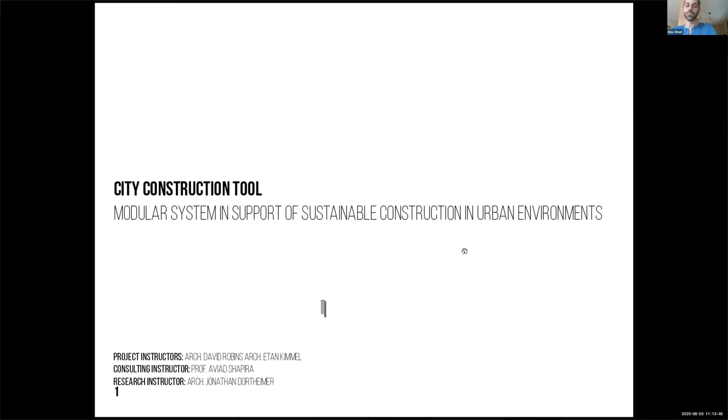So my presentation is about construction sites within the urban environment. These sites have a significant ongoing impact on our life. So the first question of this research is basically how come there are so many sites in urban areas nowadays?

Cities are constantly growing, as we all know, due to immigration and urbanization. These processes raise the land values, and hence buildings are constantly demolished and replaced with new ones which are more suitable for their changing environment. These trends raise the amount of construction sites.

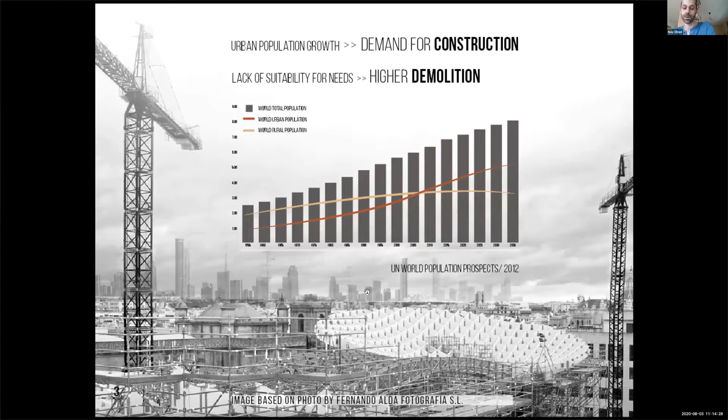Now, the potential effects of these sites include traffic congestion, delays, disruption of economic activities, large amounts of construction waste, noise pollution, as well as compromised walkability, as we can see here in this picture. Out of these, the most severe impact is considered to be the damage to the urban traffic infrastructure, including cars, bikes, and most importantly, pedestrians.

Next, I will examine the city of Tel Aviv to learn more about the scale of this issue. As of January 2019, out of 47,000 existing buildings, there were about 9,000 requests for construction permits. I would like to repeat that number, 9,000 requests for construction permits, which are in various statuses.

About 2,000 of them are currently being processed. About 1,000 were already approved. About 3,500 buildings are currently in construction. About 800 final certificates have been obtained. And finally, about 1,000 have been populated over the last 10 years.

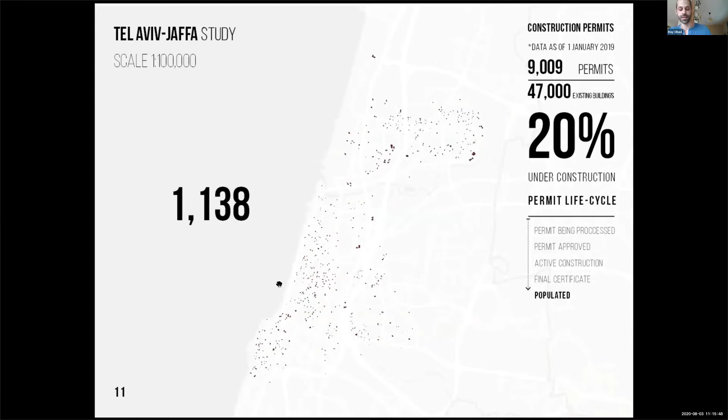So this data suggests that overall, approximately 20% of the city is constantly undergoing the construction process. Hence, I aim to study how to improve the urban construction process so that it could actually benefit the city and reduce the negative impact on its surroundings.

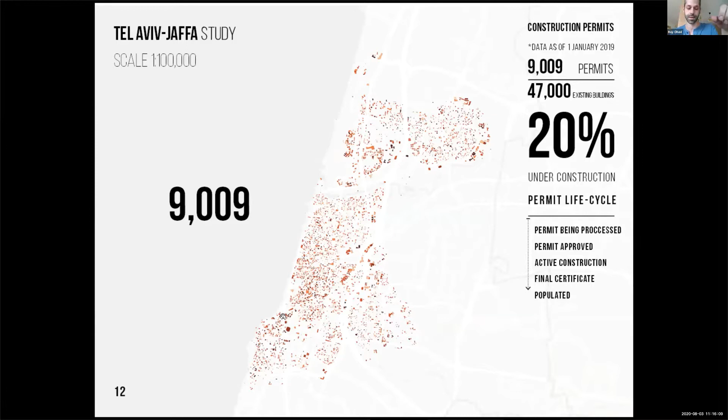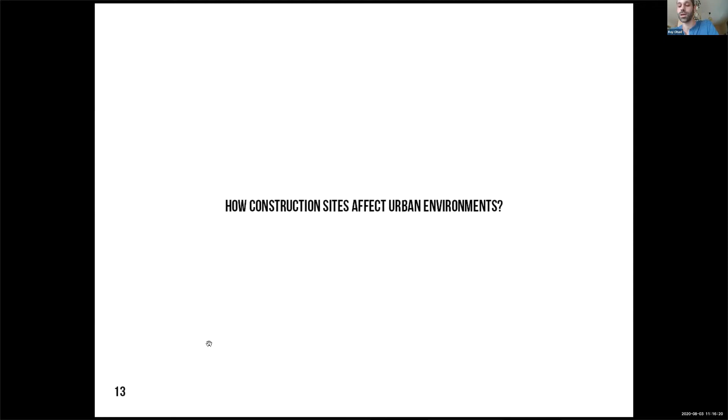So we are all familiar with the nuisance caused by these sites, but how do they actually affect their immediate surroundings, and how do the authorities react to this nuisance?

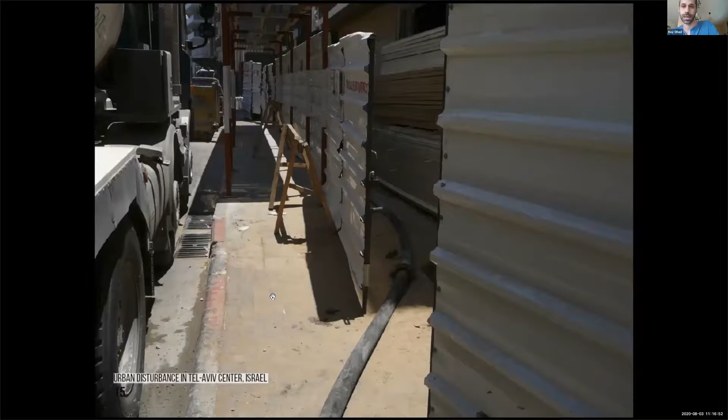Moreover, the contractors must compensate at their own expense for any damage caused by the violation of those regulations. As we can see in the pictures, those regulations are not always followed.

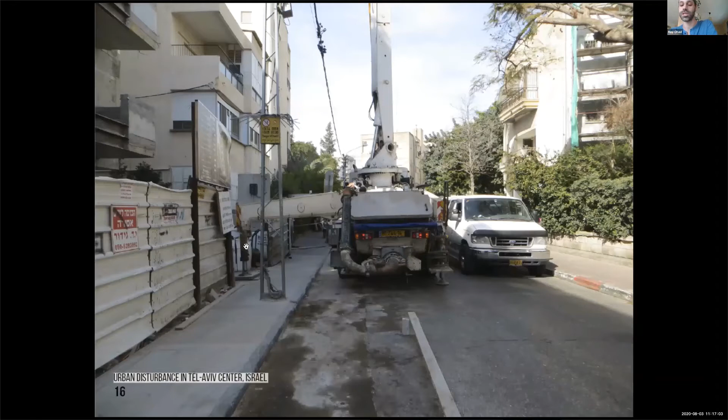So actually the construction method and the type of machinery chosen by the contractor greatly affect the severity of the disturbance. Nevertheless, in the current state of affairs in Israel, the contractor and the owner will usually choose the most cost-effective method without having to justify their choice to parties that are not involved in the contractual agreement.

So the community or the city dwellers, us, we are never a part of this decision, although we are affected by it so much, as this decision is based mostly on minimizing costs and duration of the construction process.

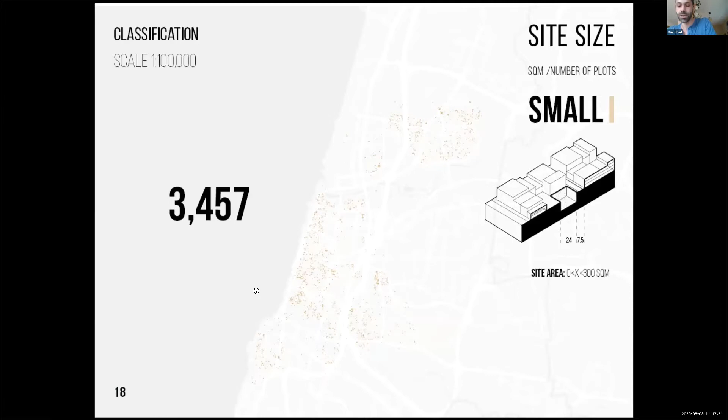So how may we classify the construction site? Is it possible to distinguish between their impacts? The most intuitive classification of the site is by its size. According to this, there are approximately 3,500 small sites, about 3,000 medium ones, and 2,300 large sites.

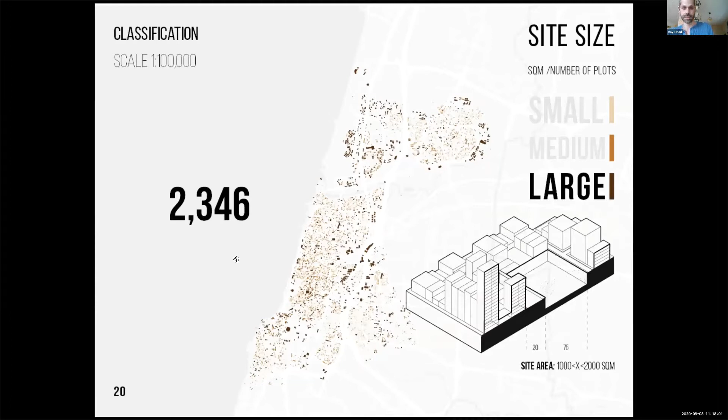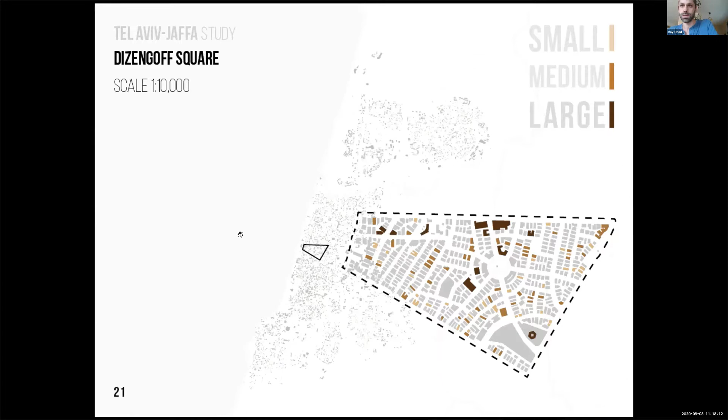We can zoom in here to the surroundings of Dizengoff Square. We can see the different sizes, as well as the permit life cycle, as I mentioned before. And most importantly, we can see here in this diagram the impact of the construction sites on the urban traffic infrastructure. Each red dot that you see represents one such disturbance to the city.

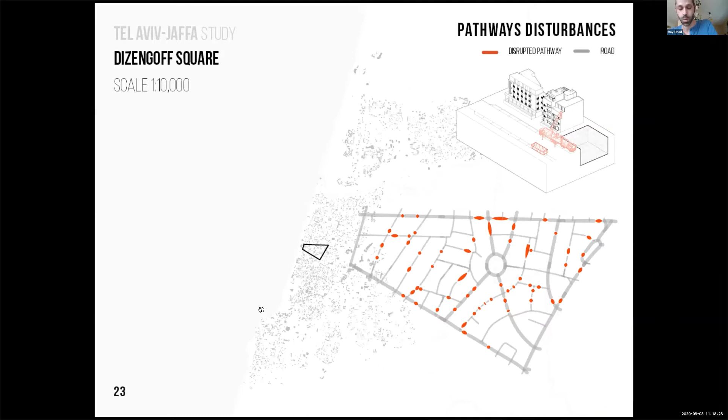So why is the impact on the traffic infrastructure considered to be the most severe? Each site requires a proper workspace. When there isn't enough space within the site boundaries, naturally public space is expropriated. There is a major burden on these sites due to the need to transport materials throughout the construction period, and this is a thing that may take even years. Moreover, aside from the material transported to the site, waste is accumulated that needs to be removed.

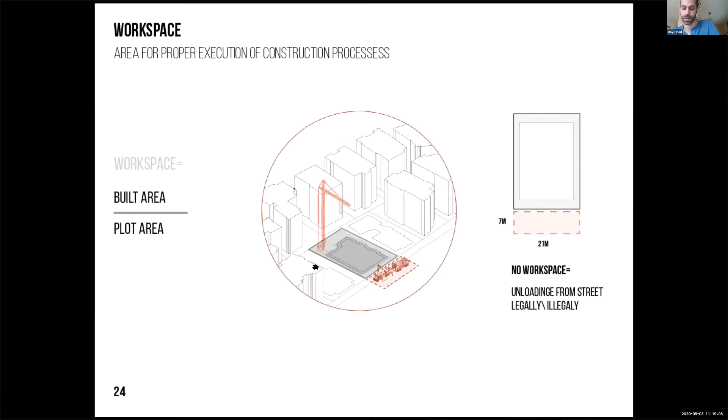So there are two main scales from which we may examine this issue. First, the urban scale, which entails travel delays, road traffic, and even accidents. Second is the site scale, which shows the prolonged closure of roadways and sidewalks, as well as the loss of parking space. My presentation focuses on the second of these scales, the site scale.

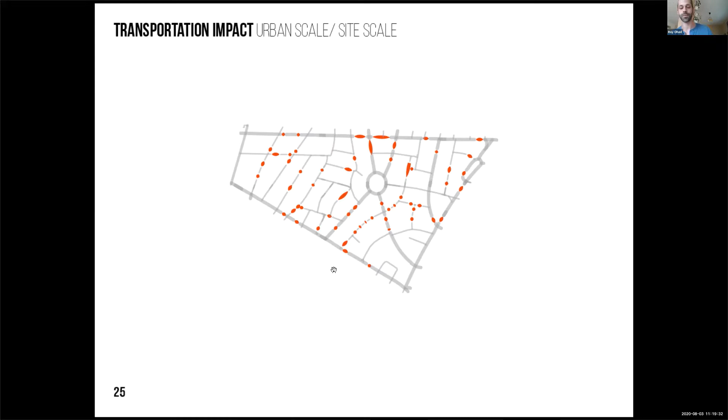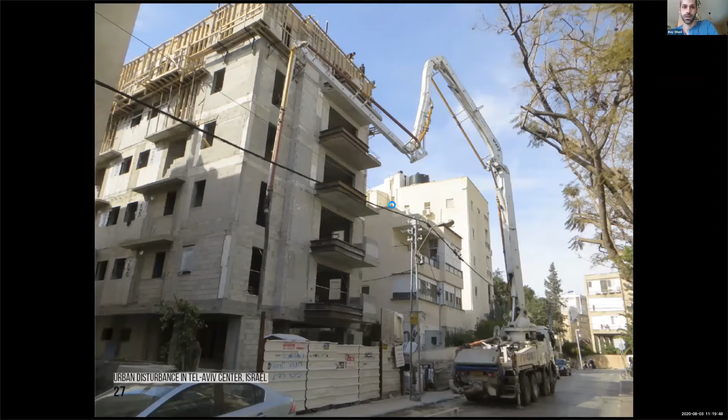So here we can see how these construction sites and the choice of machinery impacts the streetscape. These pictures are taken from Tel Aviv center.

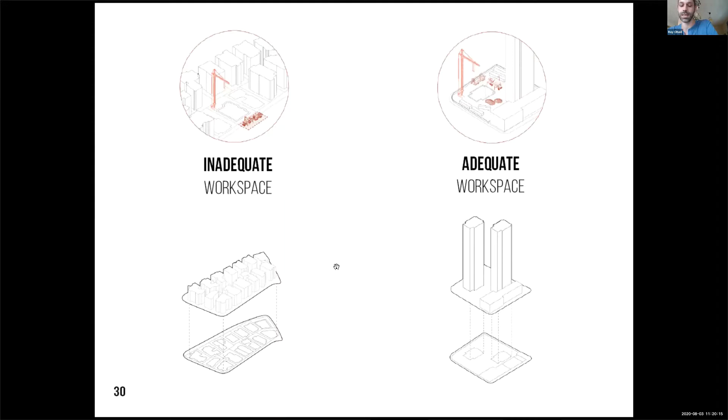It is very important, in my opinion, to note that high-rise buildings sometimes tend to have a small urban footprint. So in those cases, they may cause a prolonged and severe disturbance. Therefore, the size of the site may not be the best way to examine this issue. Instead, I suggest assessing how adequate the available workspace for construction is.

A typical construction process for concrete buildings consists of several main stages, starting from the groundwork, continuing with the foundation work, to the structural frame, and concluding with the finishing work. Nevertheless, some stages take place simultaneously to allow for a more efficient work schedule.

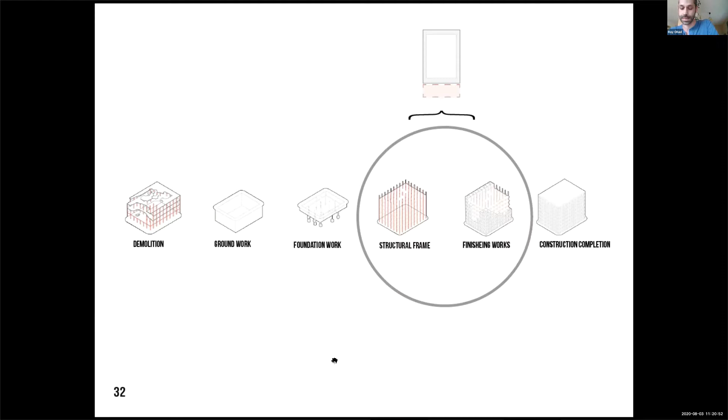Once the construction of the structural frame begins, the lack of space in the site becomes an even greater problem. So therefore, my work focuses on the construction of the structural frame and the finishing work. The processes derived from these are establishing the frame, transporting the materials for the finishing works, and of course, removing waste from the site.

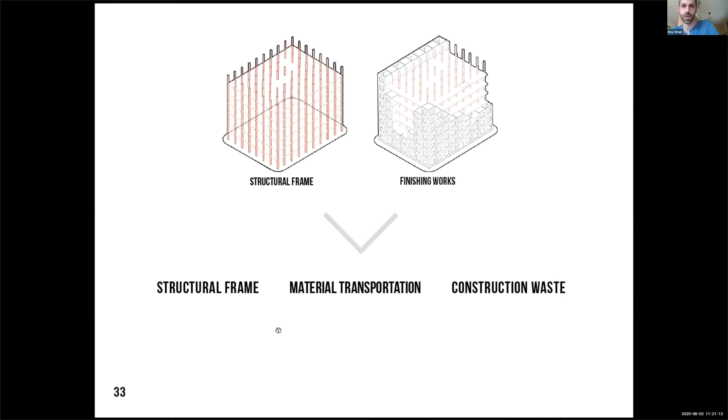So now we will examine the impacts more closely. Among the most common formations for transporting ready mixed concrete are the truck-mounted pumps, like we see here, usually alongside truck mixers. These trucks are equipped with a boom.

Can everyone see my cursor? Yes, no? Yes. Yes? Okay.

So these booms are mounted on top of the trucks, and they're using them as long as the placing point of the concrete, as we see here, is within the reach of the boom.

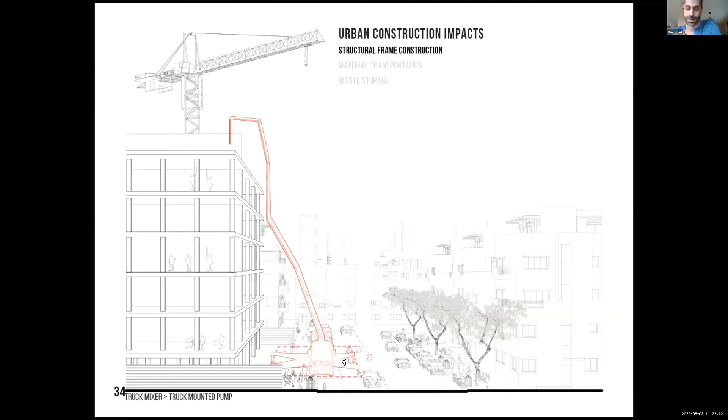So why is this formation so harmful to the city? In order to stabilize the truck, outriggers, as we see here on the bottom part, must be used, and they can be overall 8 meters wide in a way that blocks the street, and by that makes the disturbance even worse.

Nevertheless, there are other formations more friendly to the street, such as the climbing concrete placing boom, like here, that is situated inside the construction site and works alongside a truck mixer. Instead of the pump that is on the truck, there is a smaller stationary pump here.

So why doesn't everybody use this technology? Because many smaller projects cannot afford to use this type of formation due to its relatively higher cost.

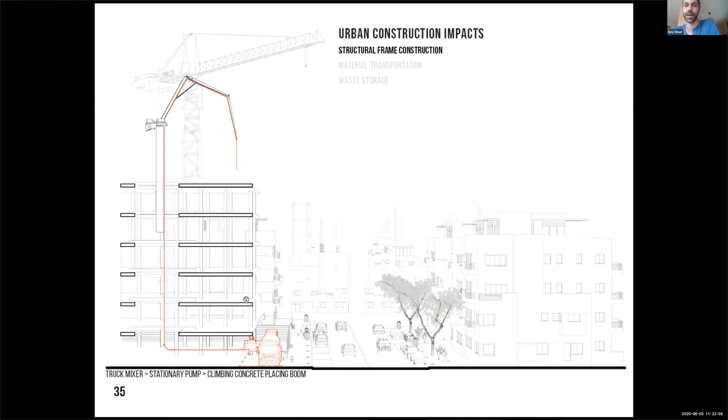The second major disturbance that I want to attend to is the material transportation. There are two basic methods that we can see in the city for transporting materials, both to the construction sites and within the site itself, moving it from one point to another. If there is enough room for unloading, the site storage method is the most common.

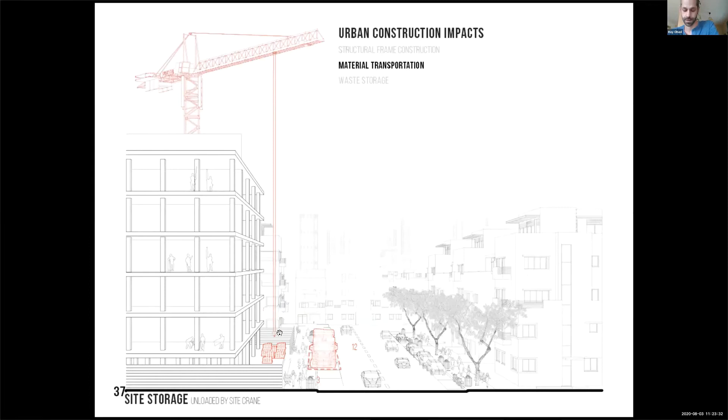Here we can see the loader crane, which is a truck equipped with a crane that unloads the materials to the site. Another form of this method is the site crane that unloads the materials.

So why is this method a problem to the contractor? The term that describes this situation is double handling, which means that materials have to be transported twice. First, from the truck to the storage area, and then from the storage area to its final point on site. In short, the crane works longer and the cost is higher.

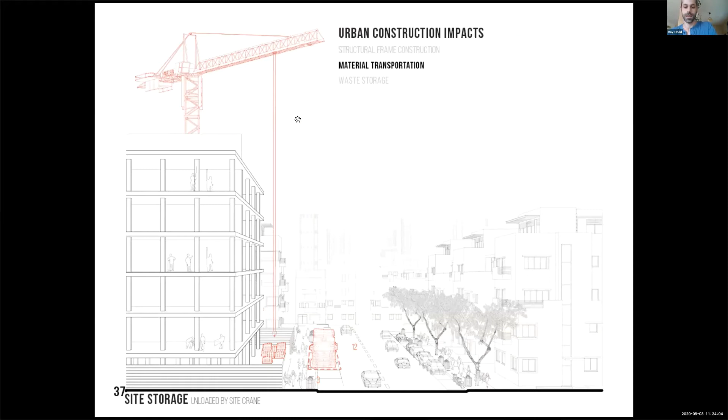The second common method is just in time. Here, materials arrive exactly when they are needed, according to the construction schedule. This is common and convenient for the contractor since there is no need for space and usually no double handling.

But why is this method so problematic for us, for the city dwellers? Because it creates a constant burden of trucks on the street. In my opinion, it is very important to note that the urban sidewalks became platforms for unloading construction materials, instead of serving us, the city dwellers, properly.

Here we can see another version of the just-in-time method, where the loader crane, the truck, unloads the materials.

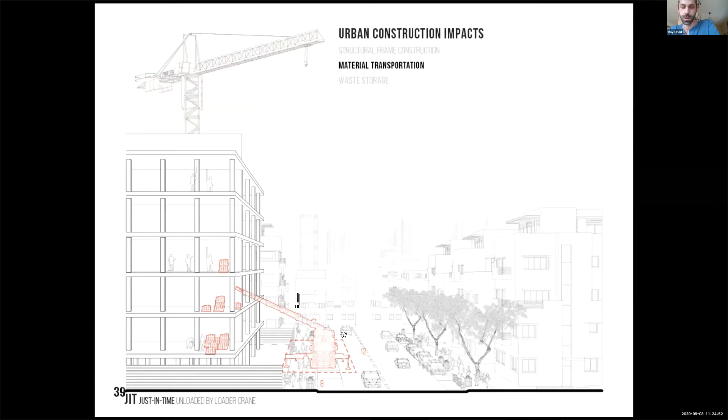Transportation of heavy elements may cause an even bigger disturbance. Here we can see precast items that require initial fixation in their final location, and therefore cannot be just randomly placed on site. Therefore, when just-in-time is used, they cause prolonged unloading times and worsen the disturbance even more.

So to sum up the material transportation issue, the just-in-time method is usually better for the contractor, while the site storage method, the first one I showed, may serve the city dwellers best, only if there is a proper area in construction sites for unloading.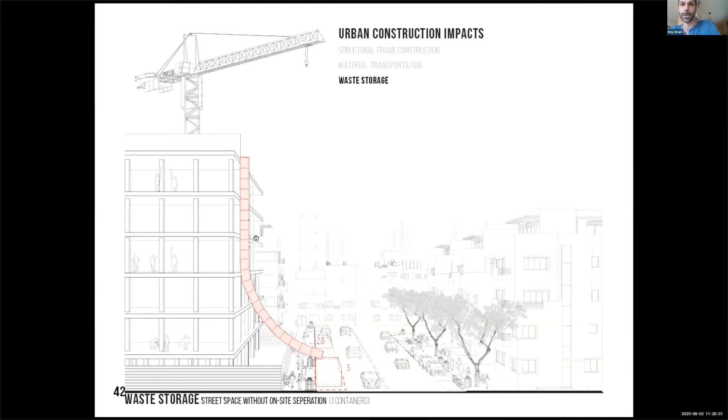And here we can see only one container. So in summary, the disturbance consists of two main factors: time and space - the amount of time the sidewalk or roadway is blocked, and the amount of public space being expropriated.

There is a subset of my work in an associated research course for which I have written a thesis, more focused on how to calculate these parameters. I will not get into the details now, perhaps later if time allows.

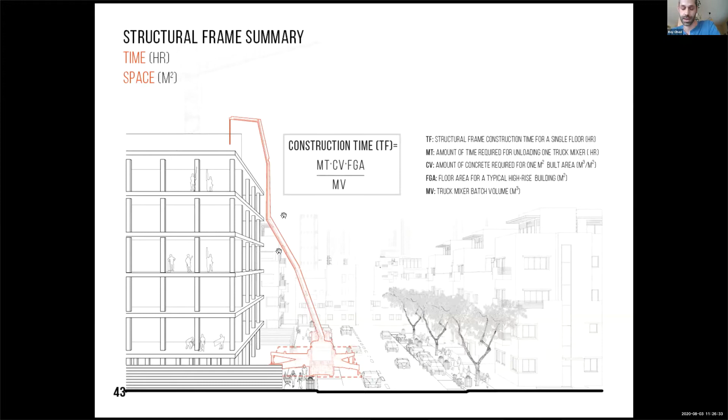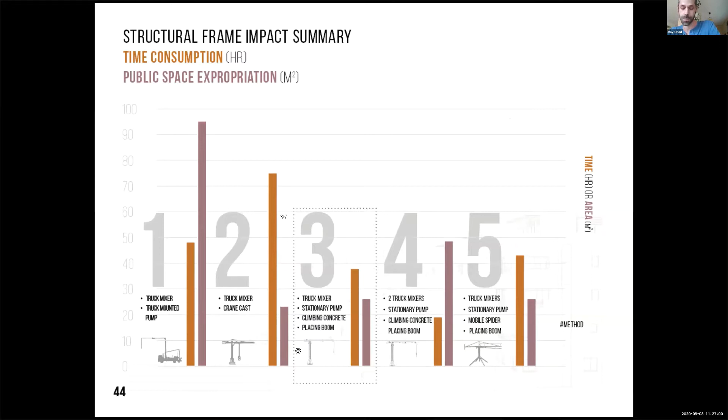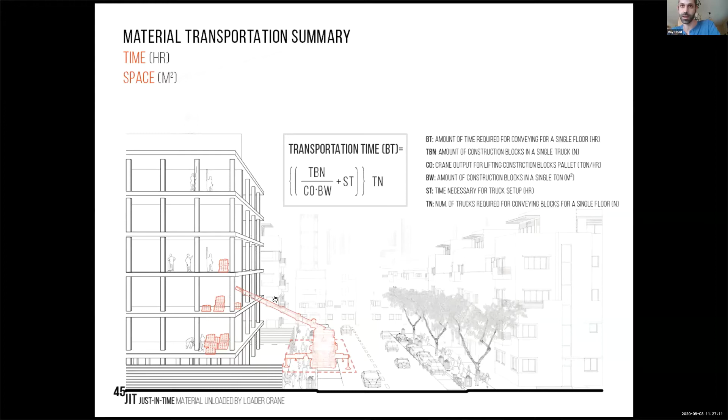It is also possible to calculate the time of disturbance in a similar way for unloading all the materials for the finishing works. I will not get into the details now.

So, the research question is: how to support material transportation to urban construction sites in order to reduce traffic disturbance and improve urban pedestrian experience.

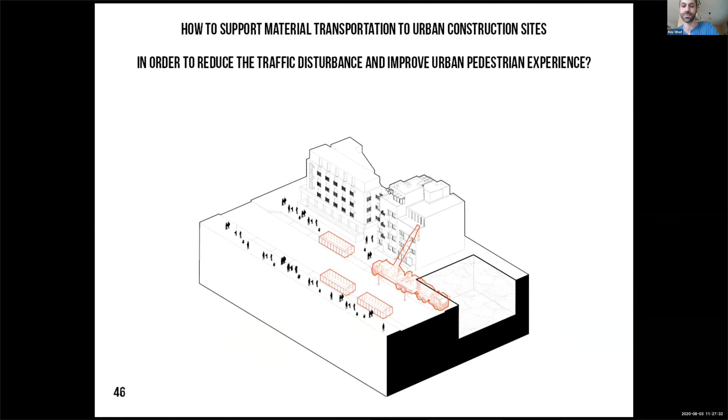My design proposal is a city construction tool. I suggest a temporary structure that consists of two components: an elevated storage platform, which we see here to the right, combined with a facility for construction workers. The unloading point is situated in between the two.

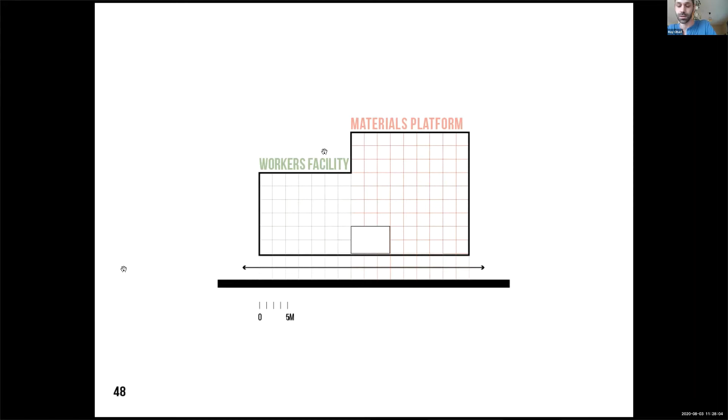By using this external system, the sidewalk can be reclaimed for pedestrians, as we see here on the ground floor. In plan, the structure is attached to the constructed building, situated in between the two, as here. Again, by using this external system, the sidewalk can be reclaimed for pedestrians.

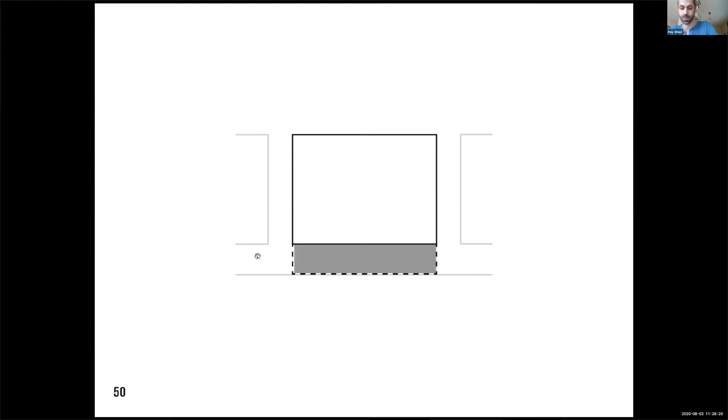The main design goal is bridging between different stakeholders, because this problem involves many stakeholders: us, the community, the city dwellers, as well as the contractor and the workers in construction. So my main goal is to create infrastructure for street-friendly construction methods.

I'm hearing a little bit of noise. Maybe someone asked something, or just someone forgot to mute. Okay.

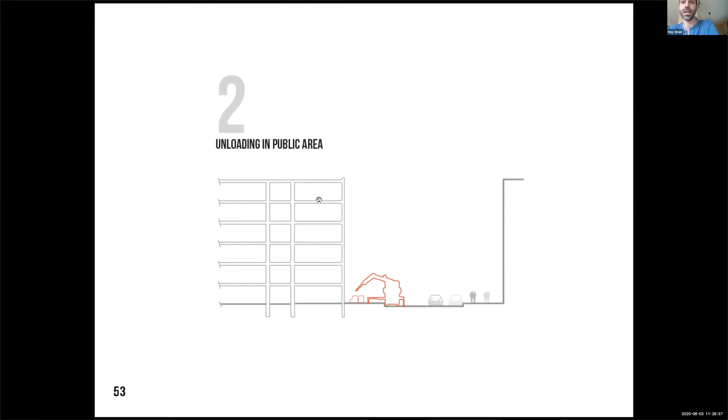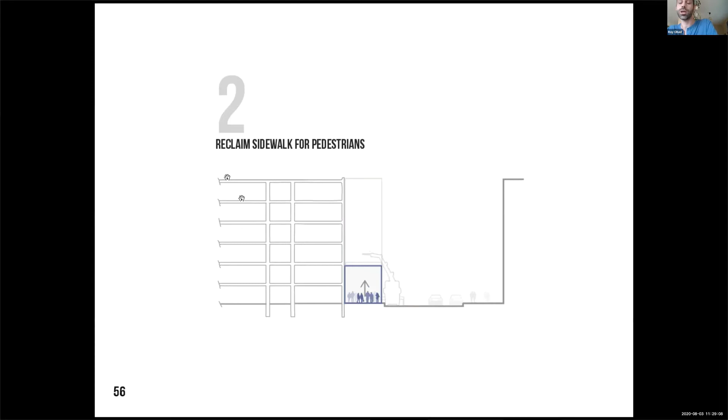Instead of unloading in a public area in a way that makes the unloading time long, I suggest an elevated materials platform, which can be used to reclaim the sidewalk for pedestrians.

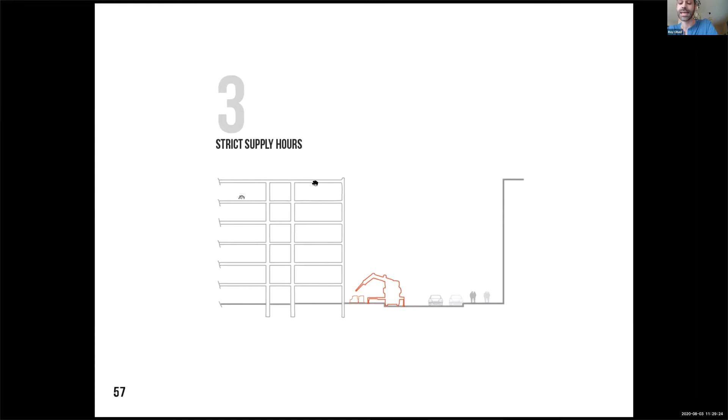Instead of strict supply hours bound to the common just-in-time method, which usually take place during street rush hours, I suggest a different method that allows transporting materials in more flexible hours when the street is not as congested.

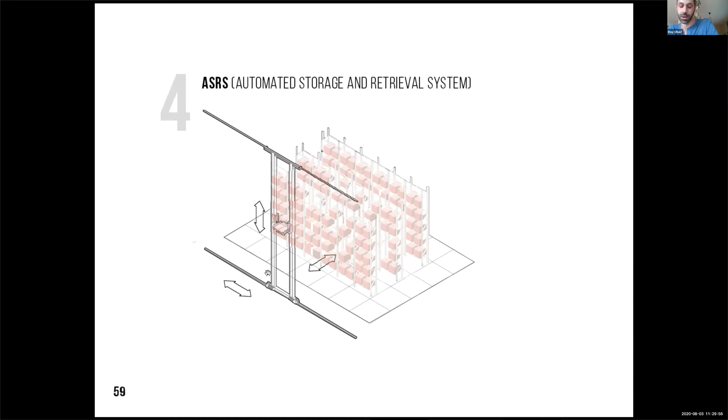The technology this suggestion is based on is automated storage and retrieval systems, in short ASRS, which has 3 axes of movement to ensure storing as well as retrieving materials, as I will explain shortly. It is based on the fact that most of the construction materials I attended to are transported on standard pallets.

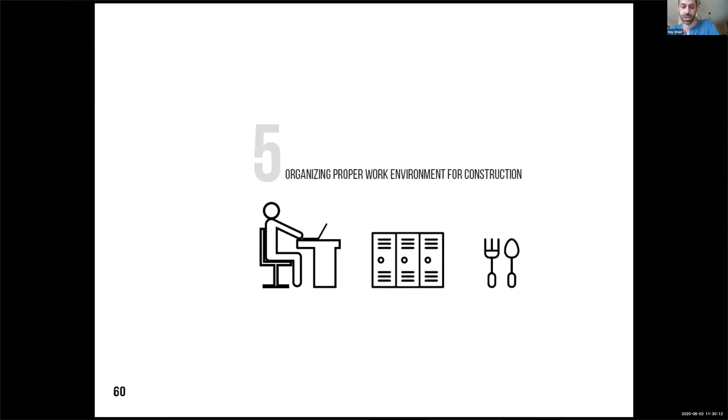Moreover, in the current state of affairs in Israel, the construction work environment tends to be neglected in most cases. Therefore, I suggest that one of the features of my suggestion will be organization of a proper work environment.

So to sum up, the design goal is bridging between different stakeholders: us, the city dwellers, the contractor, and the workers.

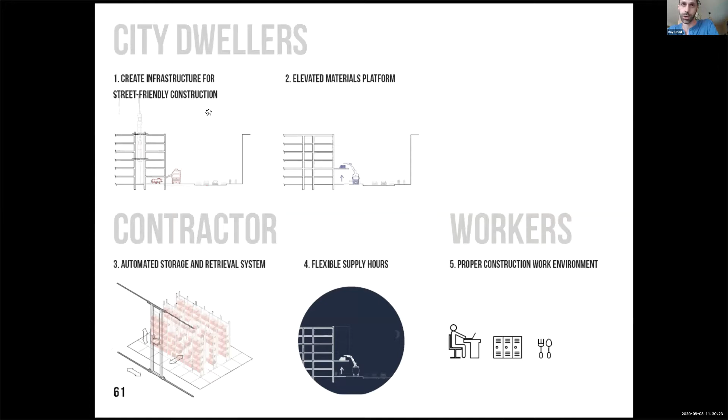I will present now a sample case of an ideal system tailored for a construction site of a relatively large scale. I will elaborate on each of the two components separately, starting with the transporting platform.

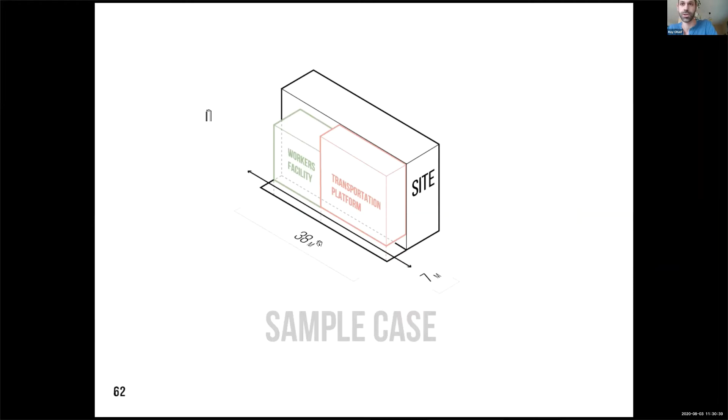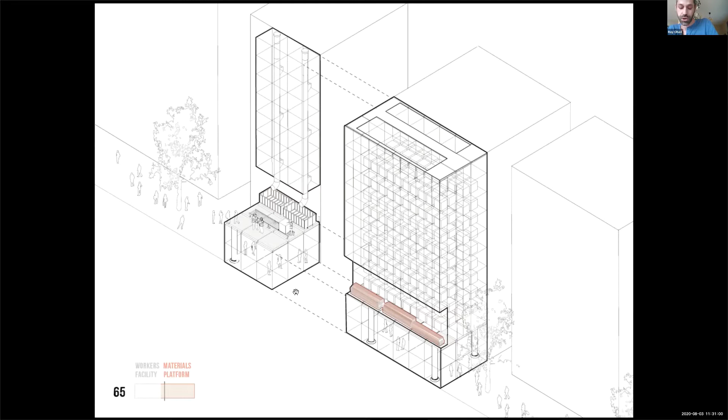Designated area for precast items that cannot be transported on pallets. And here we can see the site crane that has direct access to this storage facility.

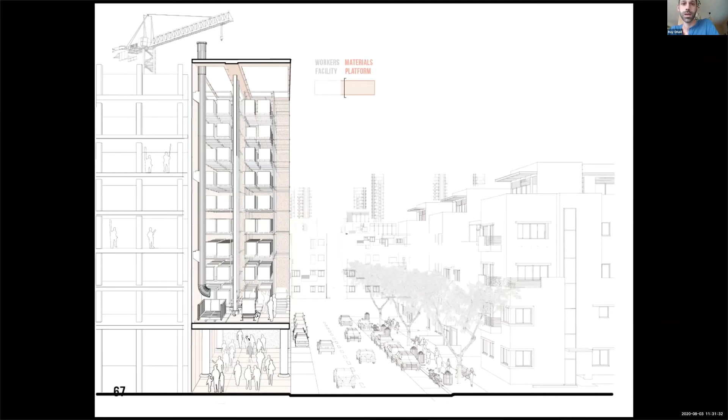Here we can see a transverse section at the unloading point that exemplifies how the construction process can happen with the sidewalk open for pedestrians. We can see next the truck unloading materials to the automated system.

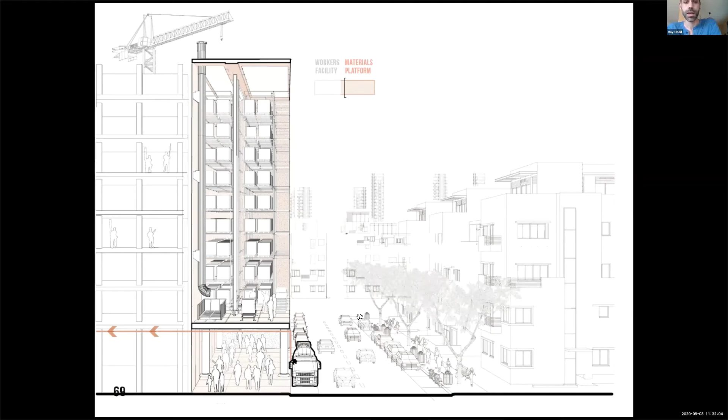Here we can see the possible establishment of the frame using existing, more sustainable methods. Likewise, we see the truck mixer connected to a pipeline that goes straight to the site in a way which allows pedestrians to use the sidewalk. And finally, we can see here the waste containers.

Now looking at the longitudinal section, we can see how the two components are connected. Please note the difference between the right and the left side. Considering the constructive aspect, the right floor is based upon beams and columns due to the heavy vertical loads it must endure, while the rest of this suggestion is based on standard scaffolding.

Here we can see the unloading point again, and now we can go deeper into the second longitudinal section. We can see the automated storage and retrieval system. Based on the abilities of this technology, it can be active independently 24 hours in order to organize the materials needed for the construction process, in accordance with the dynamic schedule, and that is to improve the construction process. We can see here how the crane accesses and loads it.

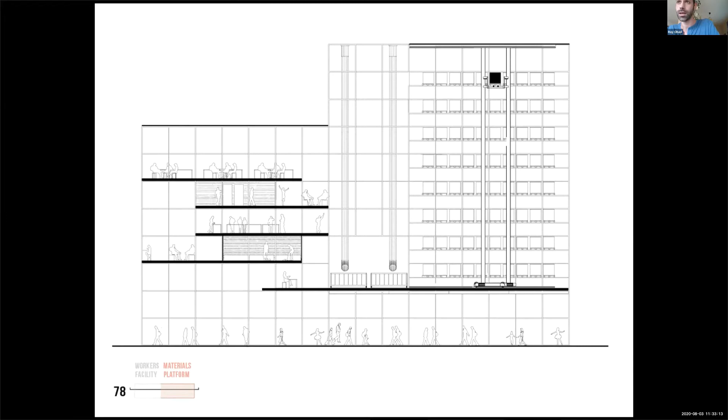Next, I would like to address the design of the workers' facility in accordance with the workers' daily activities, including different work environments for different types of workers.

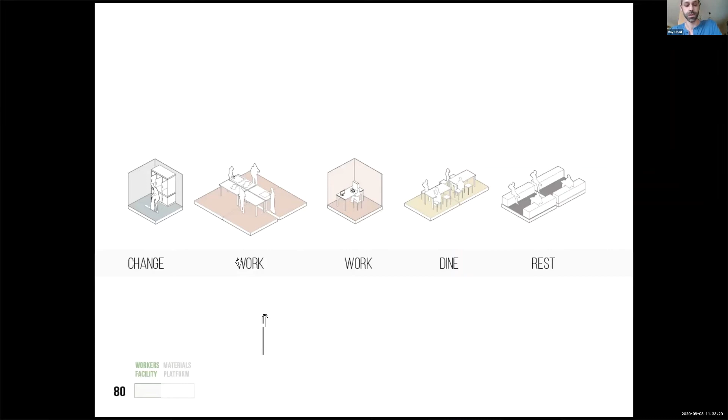So here we can see a sample case which will attend to these different activities, starting from an entrance lobby and changing room in blue, briefing room for the team of workers, as well as private work areas, and finally a dining hall.

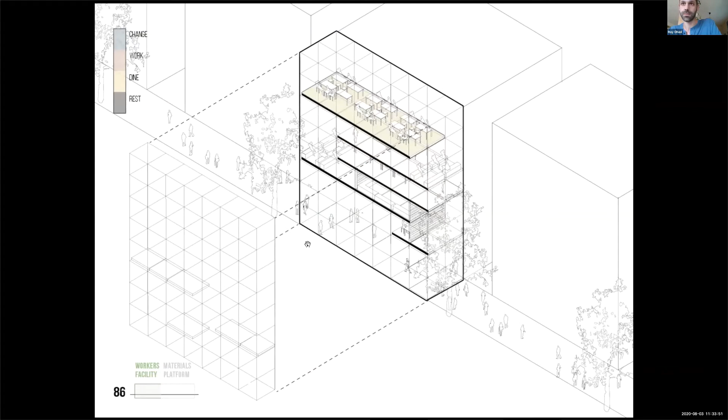Here on the plans again, we can see the entrance lobby and the changing room, briefing room for the teams, private work areas for the possible use of managers and other workers who need private working areas, and the dining hall for all the workers.

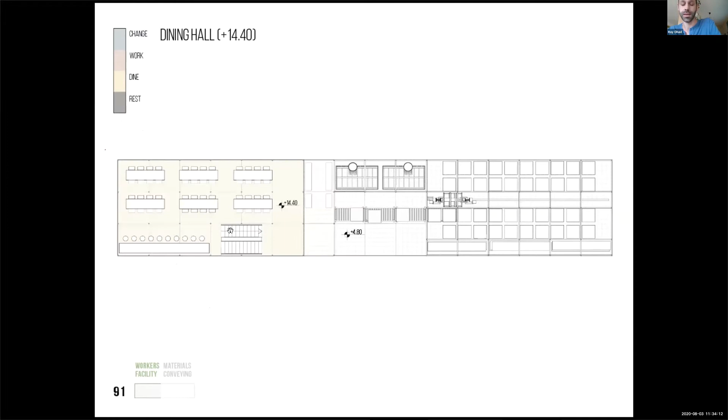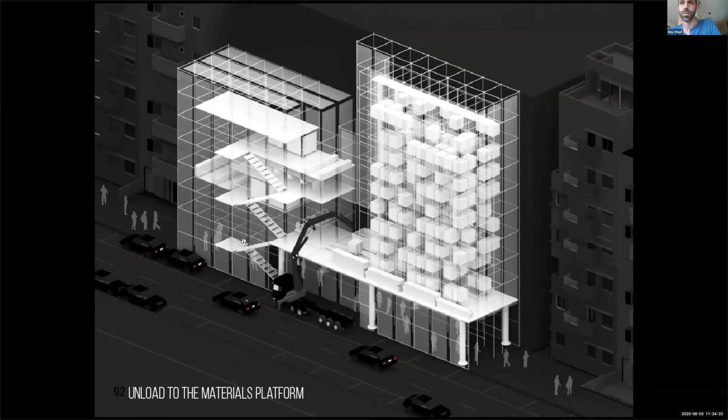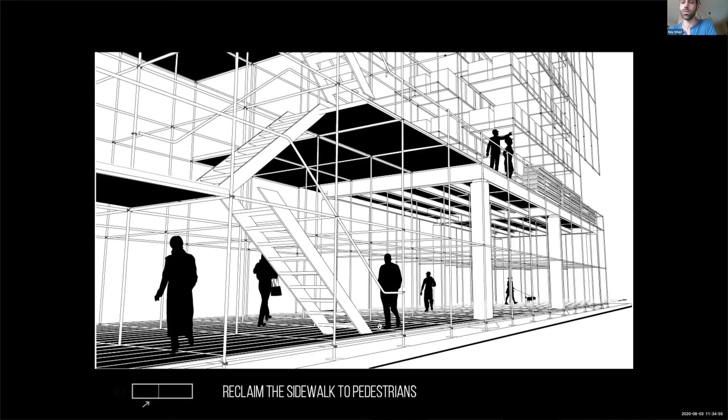Once again, we can see here a perspective of the street that, instead of being expropriated at the expense of the community, can be reclaimed while facilitating construction processes. And here we can see how it is possible to rethink the construction environment as a proper workplace for the workers.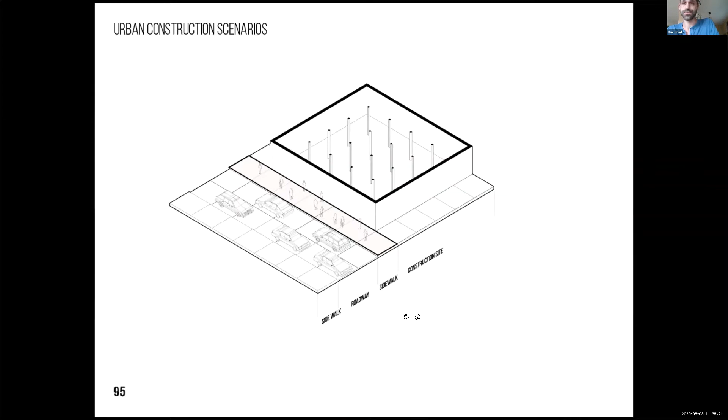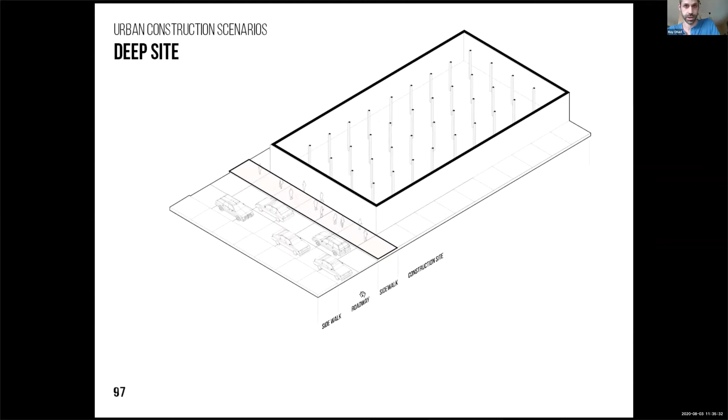We have seen how this sample case can be addressed, but in fact construction sites vary in size, accessibility, and surroundings. Some sites have a relatively long street facade, some are very deep, and sometimes we can see more than one street facade to construction sites. Therefore, this system must have the ability to be modular and reused in order to adapt itself to different scenarios.

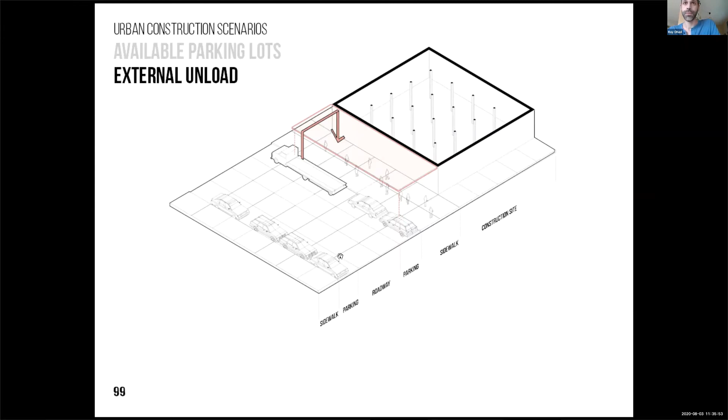For instance, in the case of a site with available parking lots, like we see here on its facade, unloading materials to the transportation platform can be done externally, like we see here. While in the case of no available parking lots, the unloading can be performed from within, like we see here.

We have to keep in mind that one of the design considerations that must be taken into account with this system is that the sidewalk must be wide enough to ensure the proper passage of city dwellers.

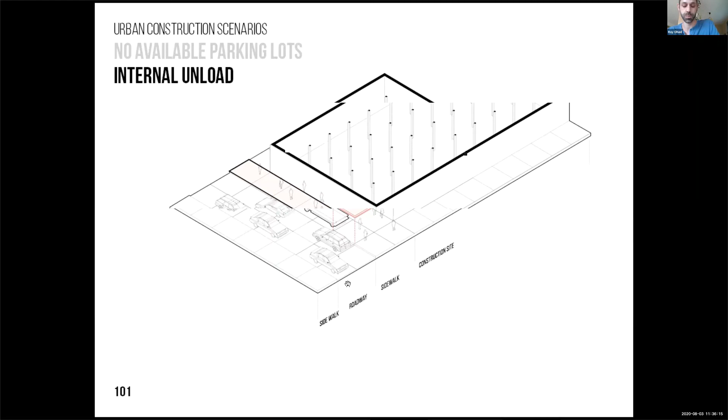In my opinion, future directions for this project should include refining the adaptability of the temporary structure to a variety of scenarios, because there are endless kinds of construction sites that need to be addressed by this system. Secondly, an interesting direction should be examining the ability of the structure to change physically over time with respect to construction needs. And finally, in order to convince the different stakeholders, most importantly the contractor, there must be an efficiency evaluation performed financially to check whether this can be cost effective.

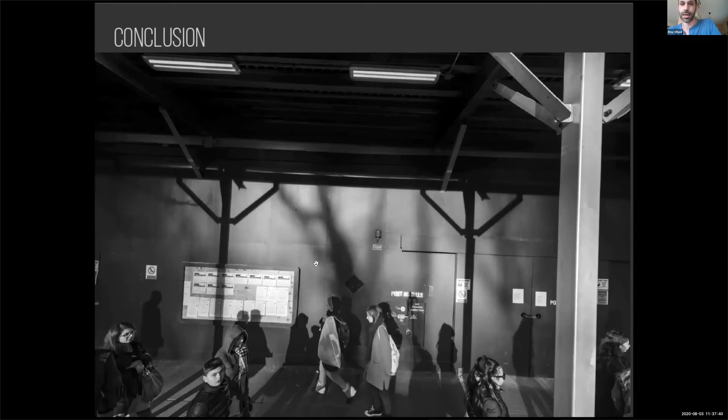To sum up my presentation, due to the fact that urban sites differ in size and context, this temporary structure should be addressed not as a single catch-all solution, but rather as a system that can be reused, grow larger or smaller, and change its dynamic according to its surroundings. I suggest conceiving of construction sites as an integral part of the city, rather than just through the parameters of efficiency and cost that are typically examined by engineers, contractors, and developers. So toward this end, I suggest introducing the role of architects and designers into the construction process, thus making the city a better place also during the time of construction and not only afterwards.

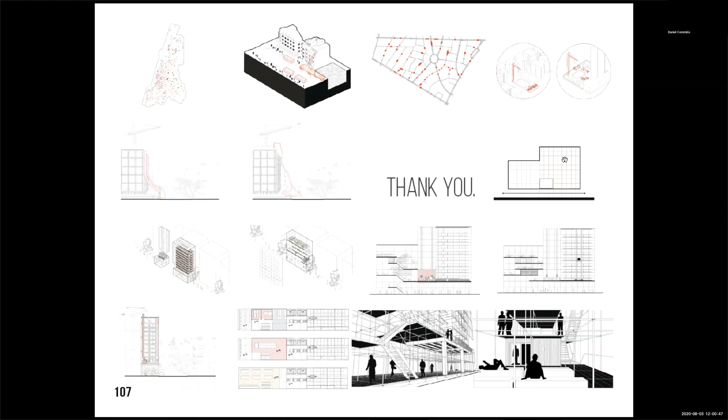Yeah, it is a very interesting field, actually, that I did not include in my work, but I read a little bit of academic research on this. I was not aware of whether it's being used or not. Yeah, it is - check, for example, what's going on in England. You'll find some smartphone systems that can warn the construction manager if something goes wrong. Thank you very much for your presentation. Thank you. Thank you.

Just one final note. Our students would normally be presenting in Hebrew, and everybody was concerned about their English skills, even though when they speak in English, their skills are usually awesome. Itay in particular was concerned. I just want to say that this was an incredibly clear and organized presentation. Whether or not it went on too long has a lot to do with the fact that there was a huge amount of information synthesized into this final presentation, and lots of things that we didn't discuss that Itay looked at over the semester. So we say in Hebrew, kol kavod - that part of it was excellent.

One final note: we're also very happy that this kind of project comes up in the studio. The final project is kind of an uncharacteristic one. At the same time, it really does represent the latest generation's look at the world, purely and objectively, to see what kinds of problems we've left ourselves with and how those problems may change and be modified when looked at, not just by engineers or city planners, but by architects - people who care about space, detail, and materiality.

So yeah, just a few words from my side. I've been following Itay for his serious way of thinking and work, and this very special topic that Itay took. I really appreciate the way in the process, and also I think Itay, you can take very valuable things that were said here by this panel, and this opportunity to have this international panel of esteemed guests.